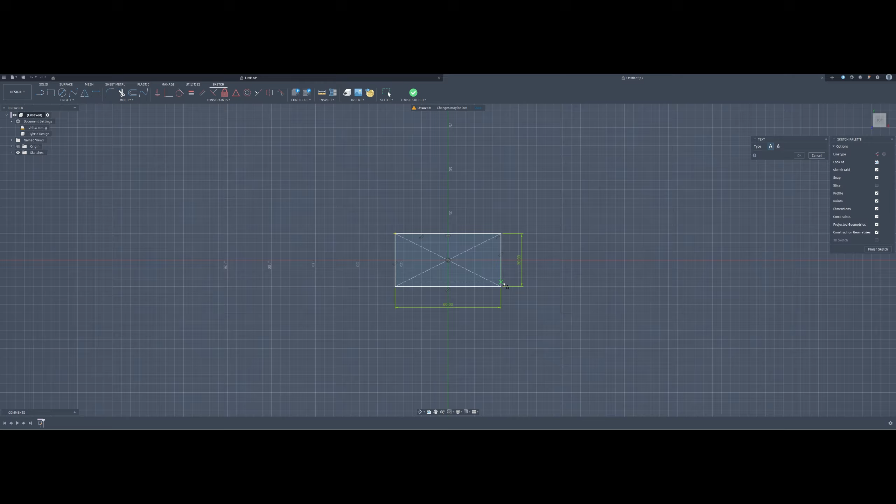So what I'm gonna start with, a simple rectangular sketch, and we'll make it 30 by 60 millimeters. And I'm gonna go ahead and insert the text into this sketch. I'll grab this corner, go over to this corner, and I'll do something simple. I'll abbreviate my channel name. I'll do A12B, Arc 12 builds.

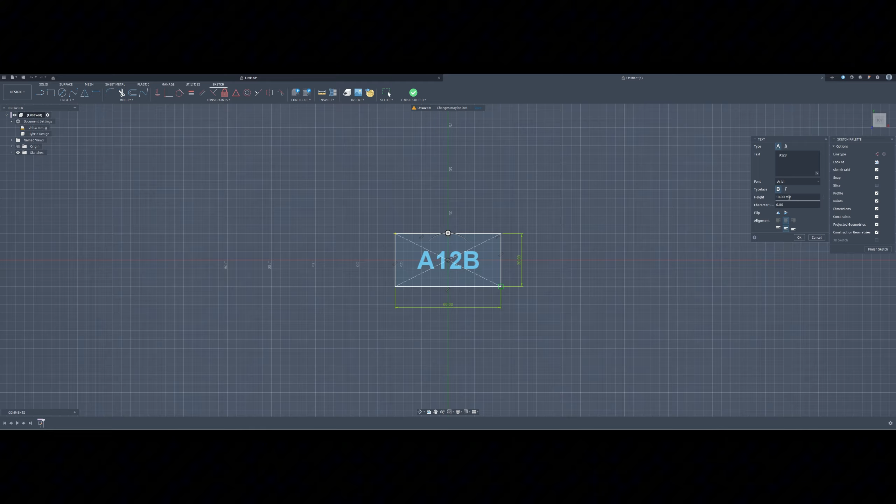Usually it'll start you off at a letter height of 10 millimeters. And sometimes you have to just be careful with how small you make the letters, because then when you put it in a slicer, you'll see that some of the letters get cut off. So I tend to stay around 10 millimeters, maybe 9, and usually larger than that. So this one I'll do 15, and I'll align them both to the center.

I'll click OK, finish sketch, and what I'll do is I'll extrude this downwards, and I'll do -2. Make it a simple small part, and then I'll reactivate the sketch, and I'll click the letters. And you can do this two ways.

You can do this by using the emboss tool, and you can click the sketch profile you want, which would be the letters, and the faces would be the face of this rectangular shape or part, and you would want to deboss it. So you can do it this way, and it'll pretty much create a cut in the surface and the shape of these letters.

And the other way you can do it is simply just by clicking the letters on the sketch using the extrude command, and then going in the negative to cut the surface. So depending on the profile you have in your 3D printer, if you have it set to a 0.2 millimeter layer height, or 0.16, or 0.12 and 0.08, you're going to want to go down by that many, however many layers you want the letters to show.

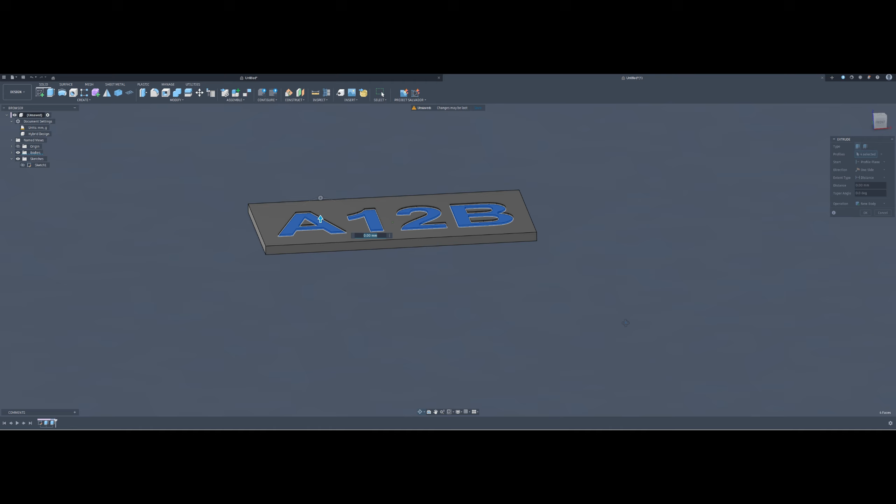And simply to have these letters show flush with the surface, you would do the extrude command again, and you would click all the letters, and then you would raise it up by how much you cut down. So since I cut down -0.40, I'm gonna raise it by 0.40, or two layer lines.

So you see that it disappears over here. That's because this operation is set to join. You don't want it to join. You want it set to new body. Press OK, and here it's on the surface now. If you would have joined it, it would have disappeared, and it would have just been a flush rectangle. So another cool thing that you can do, you can go to the Modify tab and go to Change Parameters.

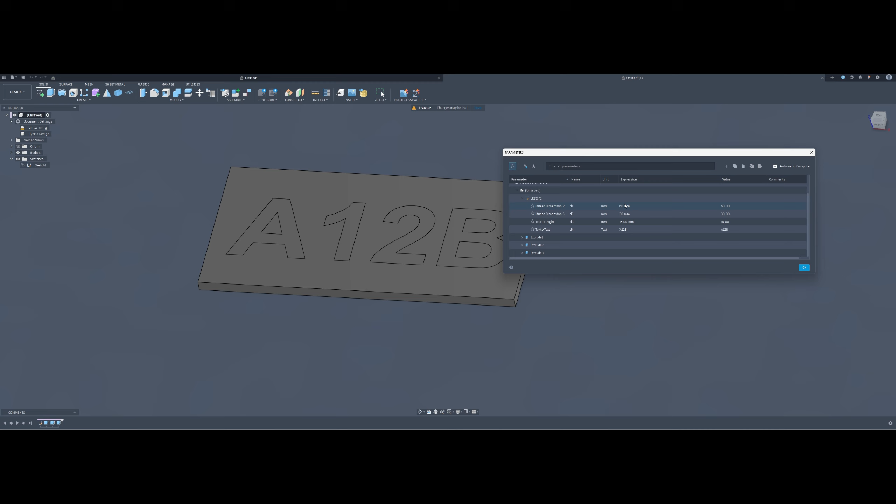And if you go over here to Model Parameters, in this case it's called unsaved. Whatever you save it as, it would show up over here. So we go to Sketch 1, and you'll see this is the dimension of the rectangle, the length of it. This is the width, and then you have the text height over here.

So let's say you wanted to make it larger, you can make the text larger. And it doesn't throw any warnings or anything like that. It's within reason, and you can make it smaller if you want. So this is a quick way to change the parameters of what's in your sketch without having to actually go back and edit the sketch and do all that other stuff.

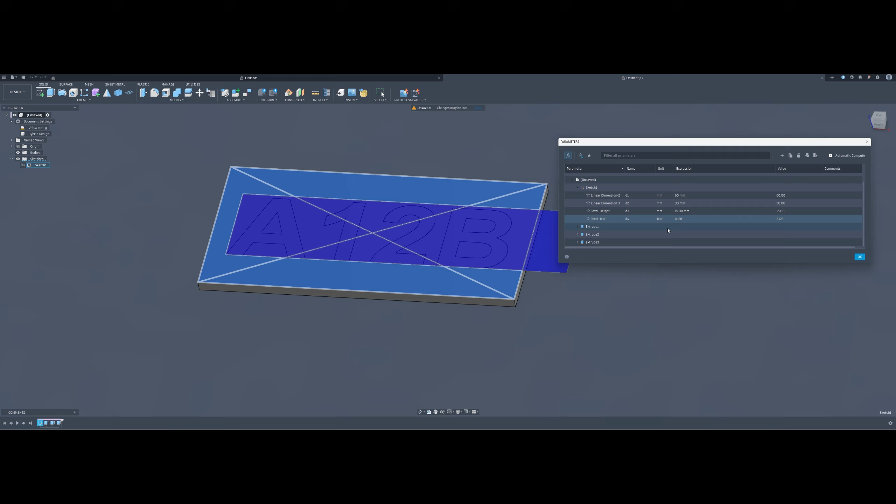And you could also change what's written in here. I could put a B, I could put a 5, and it's perfectly fine. So I'll change this all back to what it's supposed to be. So now I'm ready to send this over as a STEP file into my slicer.

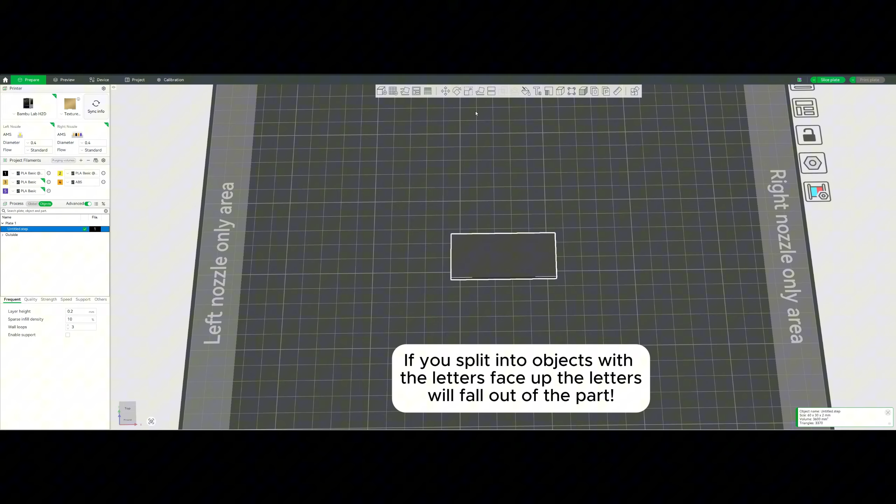Okay, so now it's in the slicer, and you can't really make out the letters too much. But when you go to the objects, you see that it all came in as one part. So we have to separate this into objects. You want to put the letters down now, so you would lay that on the face. You can also verify. It's hard to make it out, but you can see that there's a little something there,

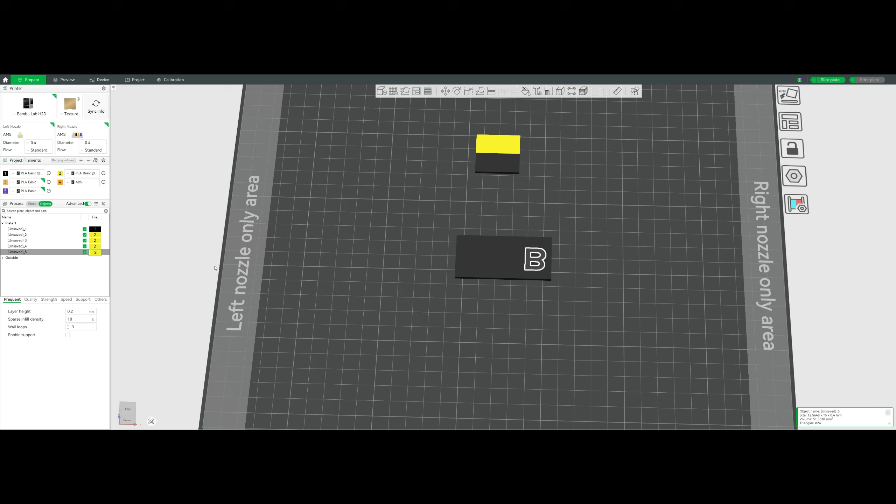right there. So what you want to do now is click the part, split to objects, and now you see that we have the letters here. So I'll put them as yellow. You see now that's where everything's at.

And you have to remember that if you use a 0.20 millimeter layer height as your cut in Fusion when you model this, you want to leave it here. You don't want to change it to 0.16 or any other number, because it will interfere with the layer height for this. So for this section, I would leave it at 0.20 millimeters.

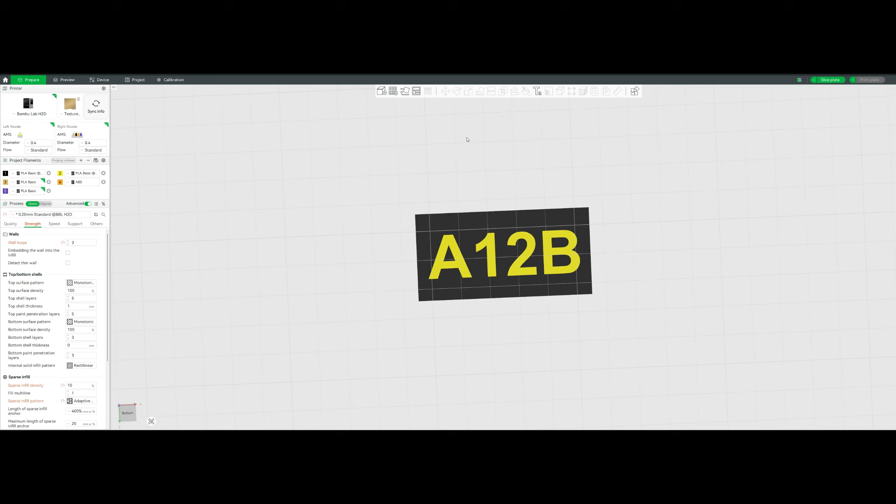And then if the letters are really small, you want to activate Arachne mode. But for this one, classic is fine. The letters are rather large. And I just did 2 wall loops. I kept everything pretty much the same, and I put adaptive cubic. You could do gyroid. For the sake of saving material, you could do lines or lightning. It really doesn't matter. It depends what you're using this for.

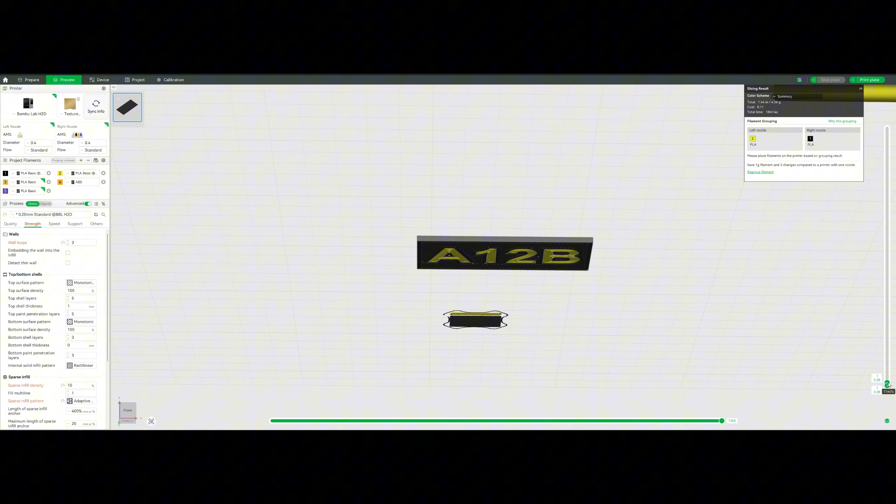So now I'm going to set this to print, and you always want to look over your first few layers to make sure that everything looks all right, because I have run into small issues when I load large files with a lot of different parts that all have labels, where the first layer looks kind of weird, but this one looks good. And I'll show you guys the finished product in just a moment.

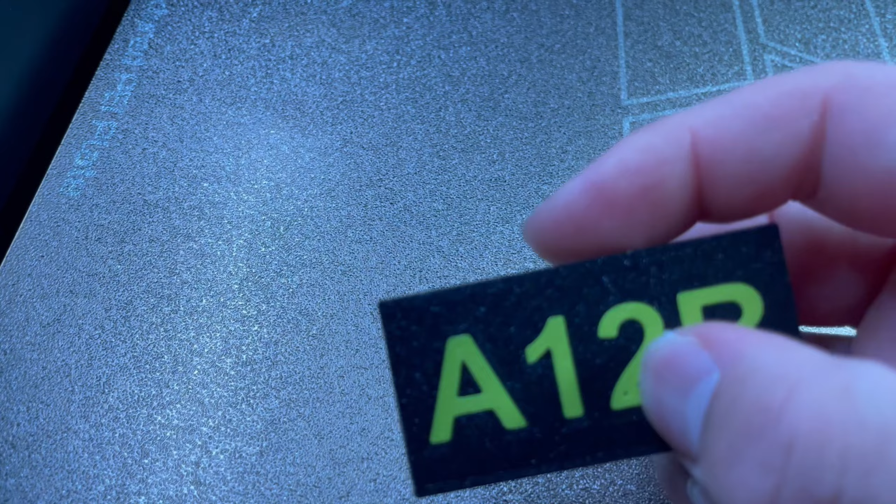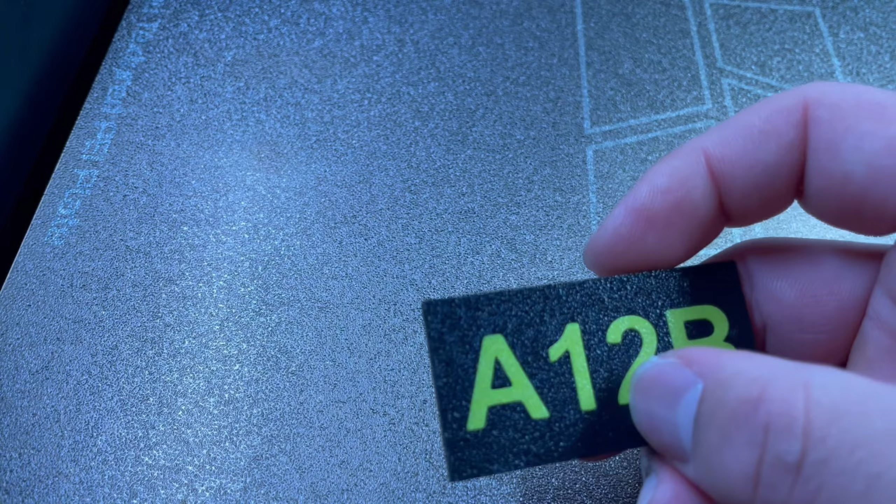This is the finished part. And it looks pretty good. Little pinhole defect right there, but that can more than likely be resolved by adding extra layers to this, possibly a 0.6 or 0.8 millimeter cut and a fill. I'll add two more layer lines to this, but I do like the finish a lot with it printed face down on the build plate. So this is how you print letters flush on your parts.